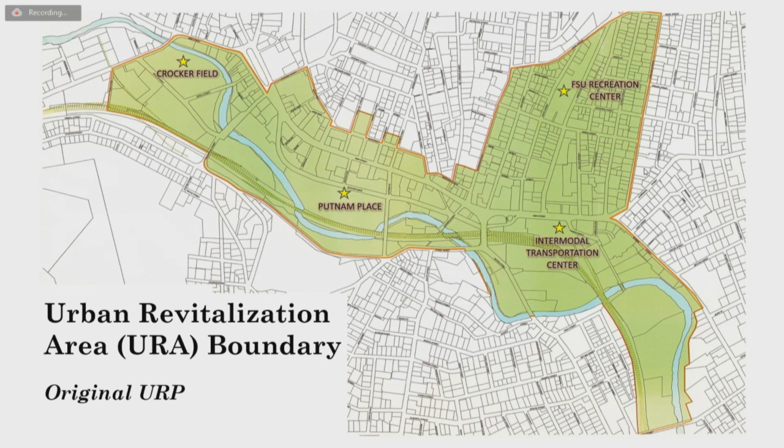Looking to River Street, we have some of the mill buildings that are there, as well as more open surface parking lots and the like that exist, and are there opportunities there for redevelopment. And then south of the plan as it existed, looking at Water Street and adding an area from Water Street, really looking at River and Water Street as gateways into the downtown and how to strengthen those gateways.

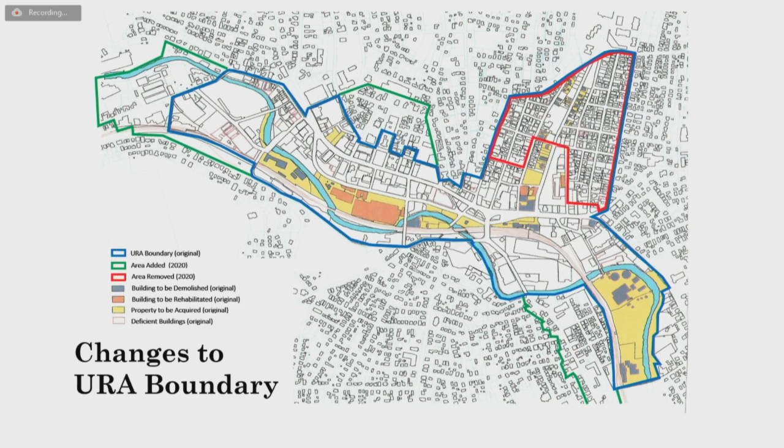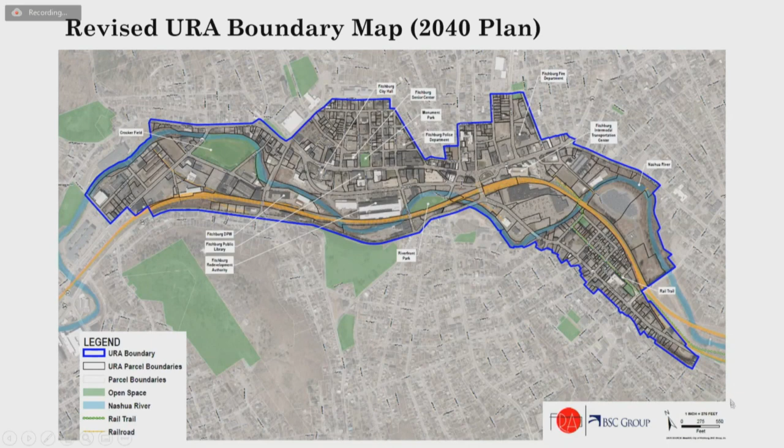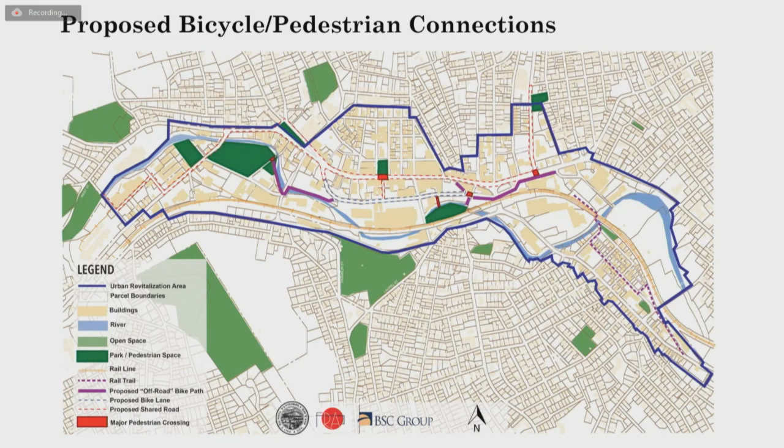And this is where it gets into the real action items within the plan. Now, we went through the prior 2020 plan, and we looked at the properties that were acquired by the Redevelopment Authority over the years, and then we layered on top of those properties that either were recently permitted, under construction, or recently completed construction within the urban renewal area as we had mapped it out. And then we looked at the properties that maybe hadn't had as much attention paid to them, or were evaluated in the prior plan, but efforts had not made their way to them yet.

And we strategically determined which parcels we would propose for acquisition in working with the Redevelopment Authority and the CAC, to talk about an approach to these actions.

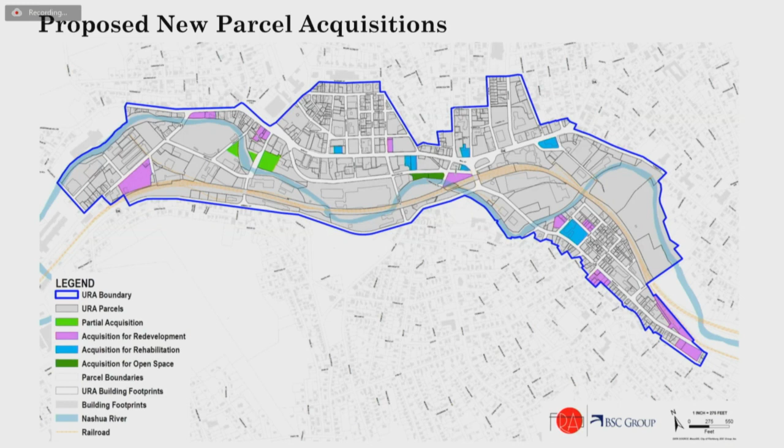And then we looked at those buildings in the downtown, particularly along Main Street, which were rehabilitation opportunities, where we wouldn't necessarily propose demolishing a building, but we would look at helping to promote redevelopment of those properties. Those buildings were determined based on various levels of vacancies, ground floor activity or ground floor activity that has ceased, and looking at how much of an impact those properties would have on the surrounding properties if they were to be redeveloped.

And then we took those properties and we put together a proposed concept plan. We'll go into more detail on each individual concept area. And with that, I will turn it over to my colleague, Jeff Vassar.

I won't talk about all of them. Some of them involve rehabilitation of existing buildings. What we're trying to focus on in my part of the presentation are those parcels that are either totally vacant or mostly vacant, and how they could be redeveloped to fit into the community's vision for your downtown area.

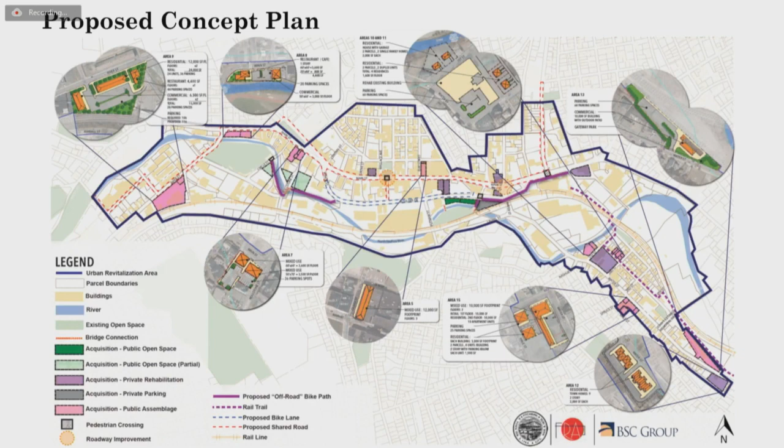So with that, I'm going to march through each one of these little bubbles that you saw on that map and explain what's being proposed.

I also want to make it clear that because we're proposing a particular type or mix of redevelopment on a particular parcel as part of the urban renewal plan, it doesn't mean it has to happen exactly as we're showing. As the Redevelopment Authority gets involved, or as the private sector on their own gets involved in a particular parcel, if that redevelopment is in the spirit of what's being proposed here, that's the main purpose. It doesn't need to replicate this exactly. But the state wants us to show that if we are showing a parcel for potential acquisition and redevelopment, there's a logical thought behind that acquisition regarding what could happen on those parcels if they were redeveloped.

So that's the purpose of doing these diagrams, is to show what we think are the realistic potential on many of these parcels. The first one I'm going to start with is called Area 7.

It's on Main Street, kind of west leading right out of the immediate downtown area. On the parcel now is a tattoo business, surrounded by parking on the right side, which this picture shows, the left side, and even behind it, with some kind of shared parking with the church that's behind it.

The diagram at the bottom with the orange building shows what we think is a potential viable reuse of this parcel. That would be new buildings along Main Street, so you don't have parking fronting on Main Street. You have the buildings and the uses fronting on Main Street.

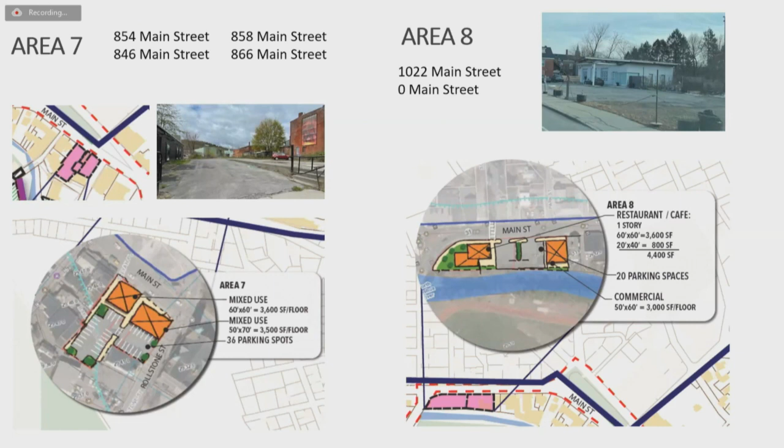Also across the street, as you all probably know, there's been some recent investment in some of the old mill buildings off of River Street and some proposals to rehab the buildings closer to River Street for residential use. So what we're proposing here is a mix of buildings.

Again, it kind of fits in with the context of the neighborhood, brings more residents into the neighborhood, which could then help support the commercial use on both ends of this parcel, not exclusively from that building, but with new residential in the building.

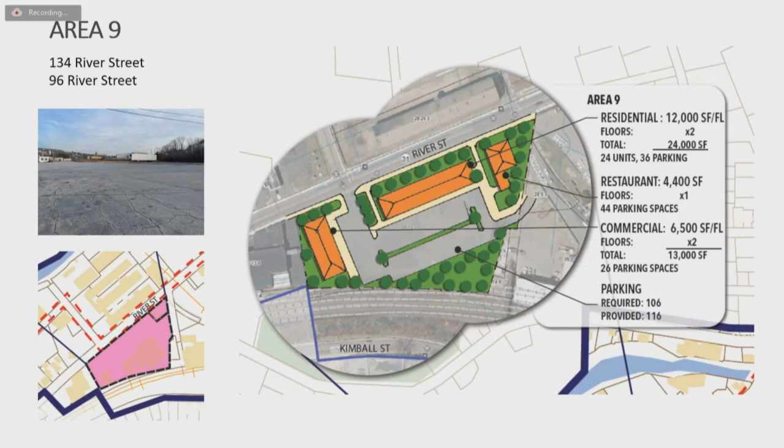Next area, we're going to move to the other end of downtown, on the east side coming into downtown. Heather mentioned enhancing the gateways into downtown. So in this particular area, we're looking at what we've called areas 10 and 11.

That area has more multifamily type residential units. So we're proposing the creation of two parcels on that vacant land there. On each parcel could be a duplex, whether it's side by side or one on the lower level, one on the upper level, whatever it may be.

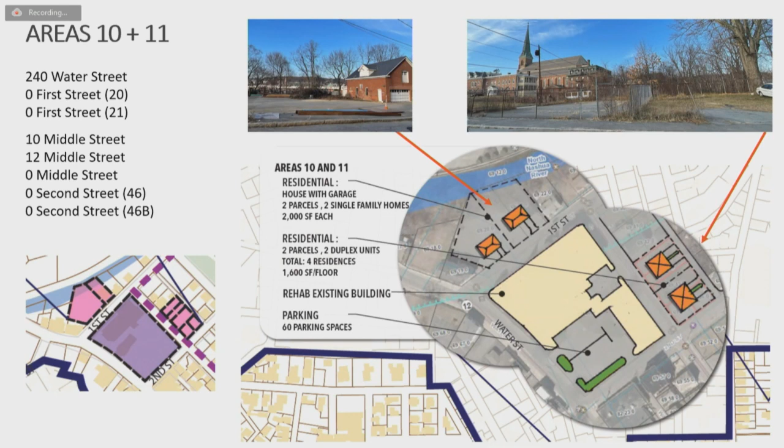It might be a great incentive and be a great asset for the community, to be able to provide that for residents or people who want to move into the city.

The property's vacant - a great opportunity for reuse of this area in the context of the neighborhood. The other thing I should mention is, you have seen residential on a number of these parcels. Residential is still an active market in Massachusetts.

People are looking for places to buy, to rent, to live in. And a lot of the retail is struggling these days. We still need retail, but it's not as strong of a market as it used to be due to online sales and other such things. So again, we're trying to be realistic and propose uses which we think there's a market for people to invest in. I should have made that point earlier.

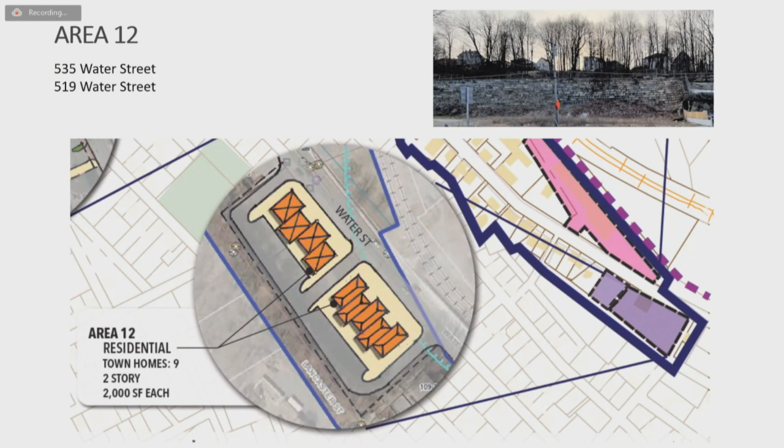The parcel itself for the flea market abuts some city-owned land, and our proposal is to combine the flea market parcel with that abutting city-owned land to give it a larger mass area. This may be a situation where the redevelopment authority may partner or retain ownership of the land and lease it out for redevelopment, because this abuts the rail trail.

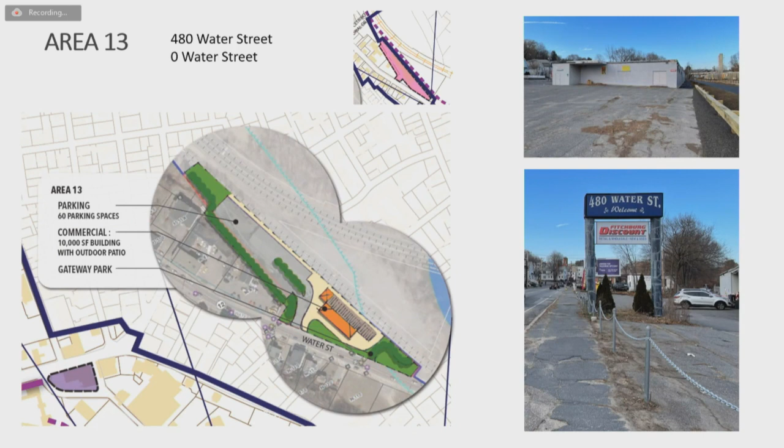Then you would have a building that would have more commercial or retail use that really supports the rail trail use, such as bike rentals, maybe a coffee shop, a small cafe, things like that. And then plenty of parking there for the business as well as rail trail users. Even part of that parking lot could be used for food trucks or a farmer's market, if the redevelopment authority was to partner with whoever redevelops the site or whoever they lease it to.

This is the last one, further down Water at the corner of Hale Street. There is some vacant land as well as a building on the corner of Water and Hale. Across from this, there's some relatively new development, the taller brick residential buildings across the street.

Actually this isn't the corner of Water and Hale, it's between Water and Hale. As you move up and get onto Hale Street, you're certainly in more of a residential neighborhood, and here is an opportunity for duplexes, similar to what we talked about by the church, where maybe it's an opportunity for an initial home buyer to get in, live on site, have a rental unit, and provide more housing opportunities in the city.

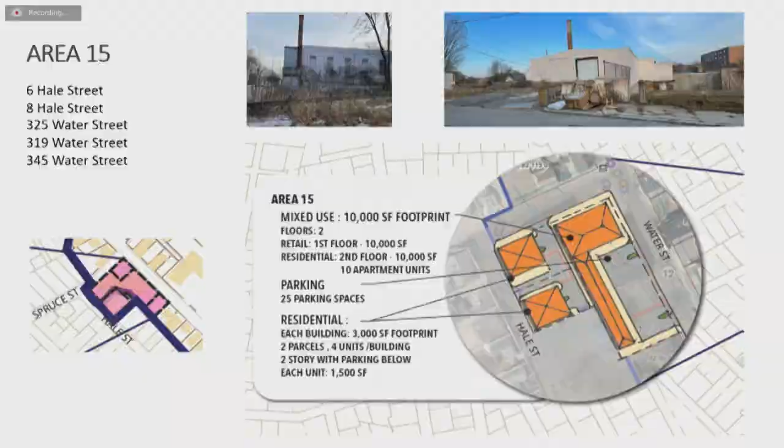In all cases here, this is a sloped area, so we're taking advantage of the slope with the buildings along Water Street, accessible from Water Street, but their backside is towards that slope. As you get up onto Hale Street, the access and driveway into the buildings would be at the lower end, so there might even be an opportunity for parking underneath with residential above, which is at the higher level of Hale Street. So that gives you the idea of what's being proposed.

Thank you, Jeff. Just to give you a sense of the next steps, the urban renewal plan document will be finalized and the final draft will be issued. The plan will then go through the requisite local approvals process with the City Council, the Planning Board, and the Redevelopment Authority. Then the plan will go to the Department of Housing and Community Development at the state level for review, as well as an expanded environmental notification form that will be completed and submitted to MEPA.

Upon the certificate from the Secretary, DHCD will then issue an approval of the plan, and the Redevelopment Authority can move forward in implementing that plan.

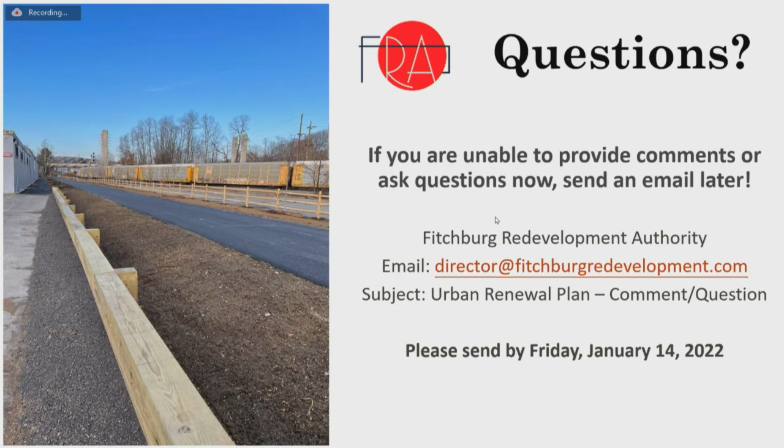All right, well thank you very much for all your questions and comments. I want to thank Heather Gould, Jeff Faster from the BSC Group, Mayor DiNatale, Tom Skwierawski, Director of Planning and Community Development from the city, the Citizen Advisory Committee, and the FRA's Board of Directors for all of their hard work leading to this presentation to the viewing public and for your interest in the project.